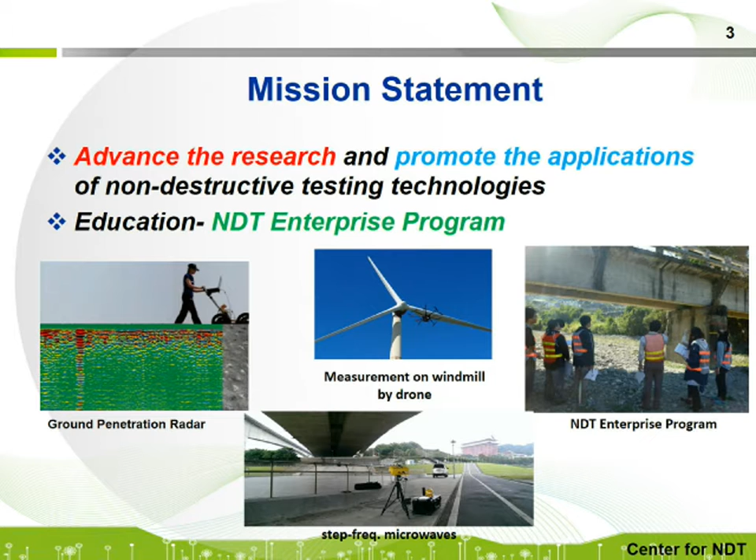General information. First, I would like to talk about the history and the revenue. The Chaoyang University of Technology was founded in 1994. Because there are several professors in our department with specialties related to civil NDT, we started the Center for NDT in 2005.

In 2014, the name of the center changed to Research Center for NDT because it becomes one of the research centers supported by the university.

The annual commissioned budget averaged 10 million NT dollars for recent years. The projects conducted by our center include testing targets of tunnel, embankment, bridge, reservoir, building, pier, nuclear power station, wind turbine, highway, and airport. So they are very versatile.

There are 7 main researchers in our center. Professor Chen, Professor Shi, and Professor Chang, their specialties are in structural NDT and structural health monitoring. Professor Cai, Professor Xu, and Professor Lai, their specialties are in geotechnical NDT. And Professor Huang, whose specialty is in remote sensing applied to NDT and image processing techniques.

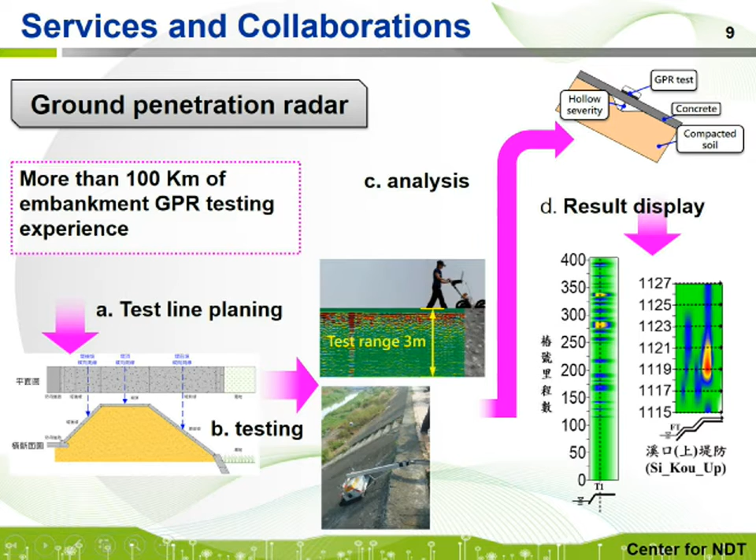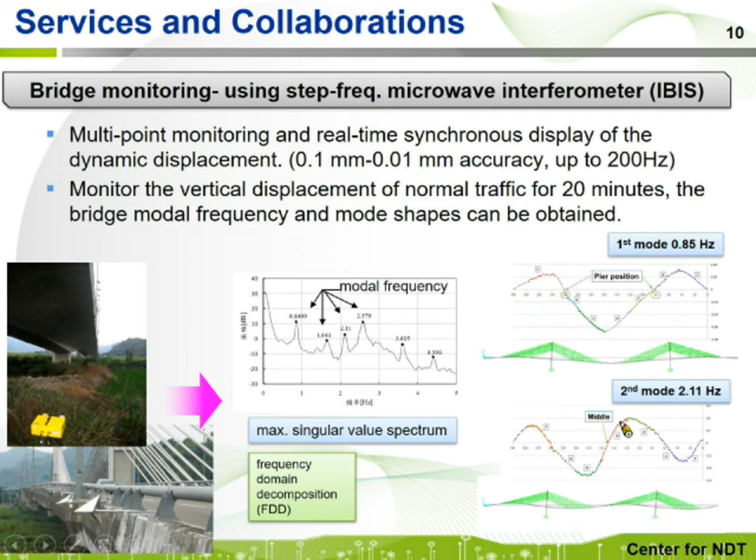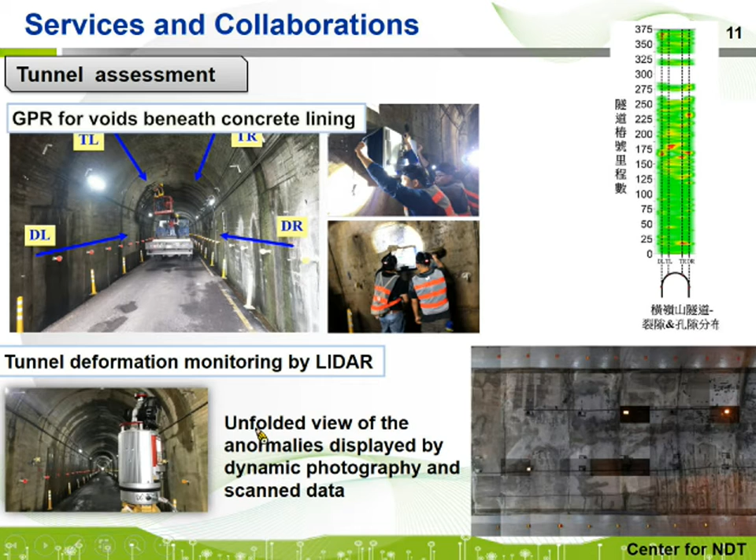We use multiple methods for tunnel assessment. We use ground penetration radar to assess voids beneath concrete lining and use LiDAR scanning to monitor the tunnel deformation, using dynamic photography and the LiDAR scan data to create the unfolded view of the anomalies in the tunnel.

For the wind turbine structural safety assessment and monitoring, two non-contact monitoring methods were applied. We use UAV carrying infrared camera and regular camera to fly around to visually inspect damages on pylon and arbor. And we use the microwave interferometer placed under a pillar to check the mode shape and the vibration mode frequency of the pillar.

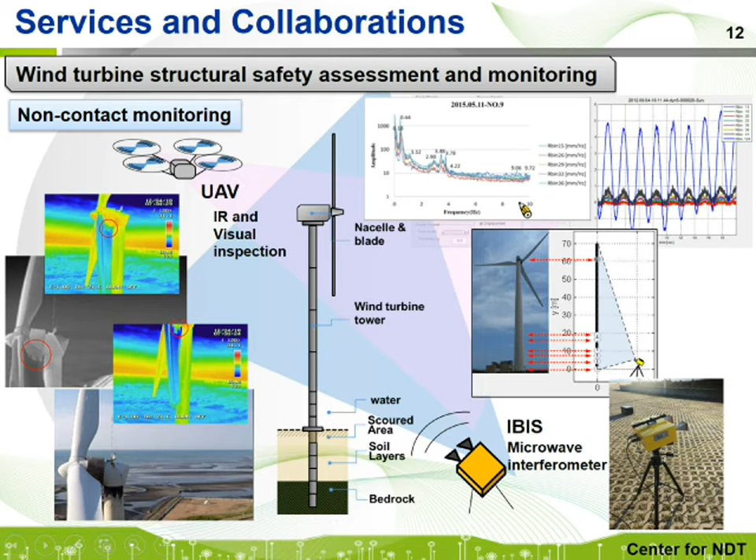I would like to introduce two innovative stress wave methods developed in our center to assess the debonding at steel-concrete interface, for cases such as concrete-filled steel tube damaged by fire, not fully filled epoxy resin for factory floor strengthening by steel plate, or the weir strengthened by steel plate.

One method is to place the small hammer impactor away from the receiver to obtain the Lamb wave modal vibration and use the difference of A0 mode dispersion curve of the steel plate to assess the debonding.

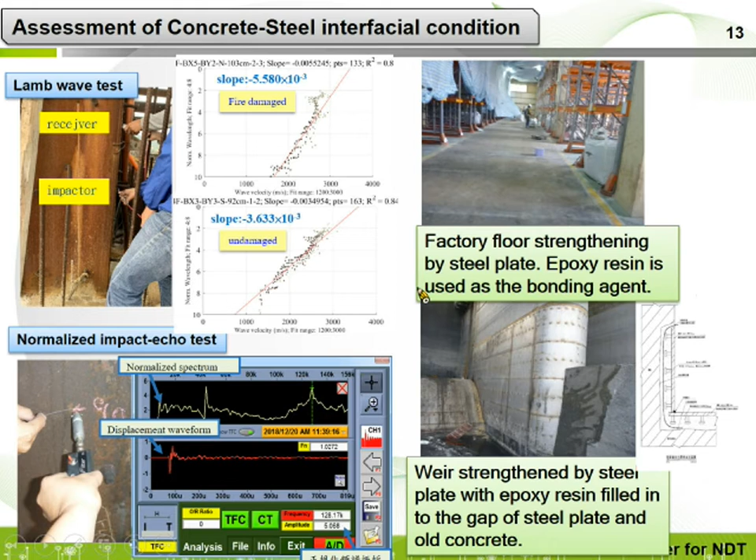The second one is to place the hammer close to the receiver and use the amplitude of the peak in the normalized amplitude spectrum to examine the voids underneath the steel plate.

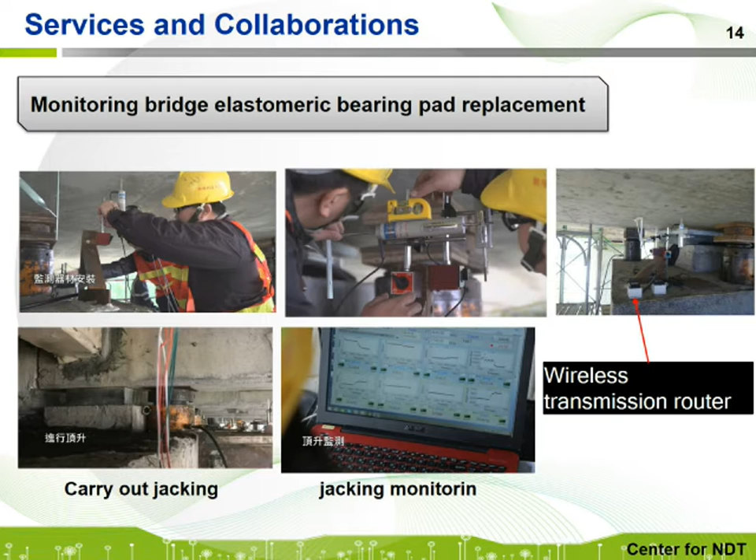Conducted many cases of monitoring replacement of bridge bearing pad during jacking up the bridge girder. Worth mentioning is that wireless transmission routers were applied to transmit signals of the displacement sensors to the computer, so that the monitoring becomes quite easy without connecting a large number of electric wires.

For the ongoing research projects, first is the project funded by the Ministry of Science and Technology. In this project, we assess the depth of damage for reinforced concrete after fire using the dispersive characteristic of Rayleigh wave group velocity. We use one impacting hammer and a displacement receiver or microphone to obtain the Rayleigh wave, and use short-time Fourier transformation and reassignment method to obtain the dispersive curve. After the proper inversion process, we can get the velocity profile with respect to depth, so the damage depth after fire can be assessed.

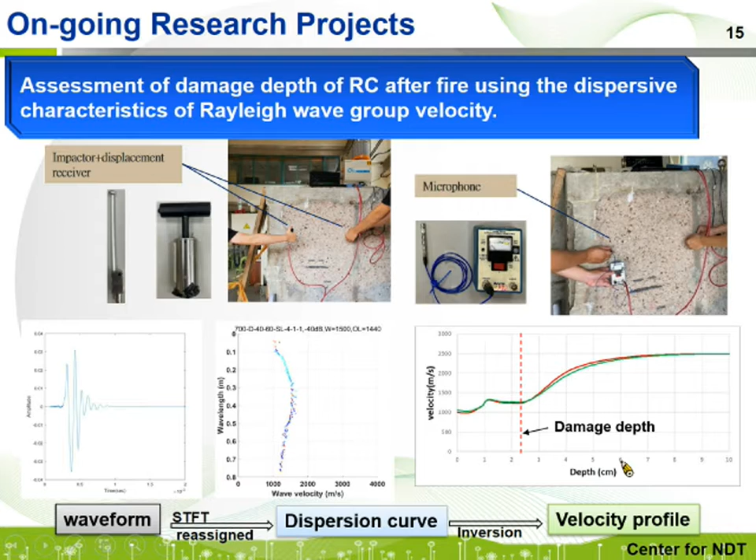Second project is funded by National Chung-Shan Institute of Science and Technology, using AI deep learning on ground penetrating radar imaging recognition for embankment assessment.

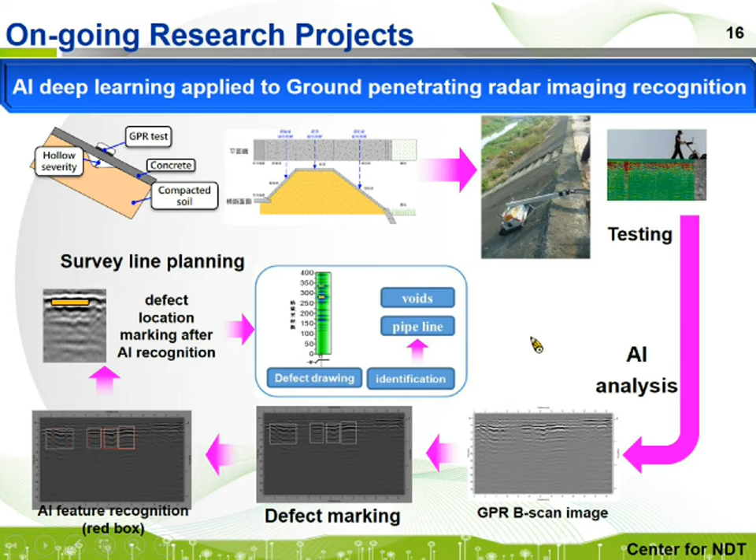An ongoing research project is to apply digital image correlation (DIC) to monitor wind turbine pillars. The preliminary research was conducted in the lab using two digital cameras to measure the 3D movement of a pillar with multiple marks and multiple defects, using the modal difference index to identify the severity and location of the defects.

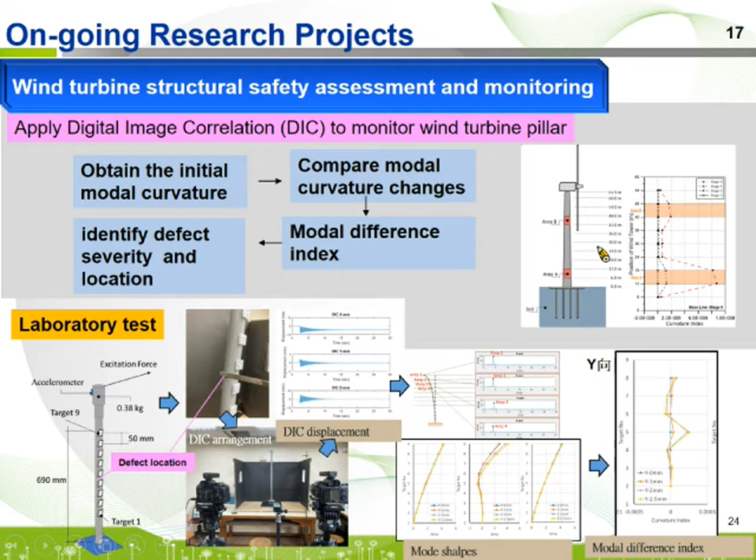Education: our center supports junior and senior year projects, also the NDT Enterprise program, which has 15 credit hours. In the program, students can learn how to operate NDT instruments. They also need to take designated courses related to non-destructive testing and financial management. Currently, about 130 students are enrolled in this program.

For international cooperation, Professor Chia-Chi Cheng and Keng-Tsang Hsu cooperate with Professor Yi-Ching Ni of Hong Kong Polytechnic University for a project to assess delaminated cracks in cement asphalt mortar layer of high-speed rail tracks in China, using the normalized impact echo method.

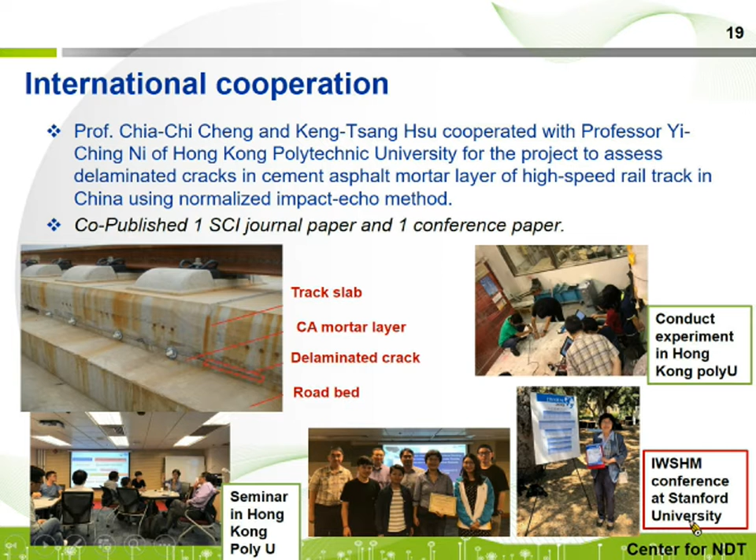Professor Chi Hong Chiang represented CYUT Center for NDT, participating in the annual meeting of the World Federation of NDT Centers. The meeting was held in Minneapolis, USA, in 2015.

In the recent 5 years, we published about 10 journal papers each year, and also several conference papers. So we welcome scholars from all over the world to visit us, and also students who are interested in non-destructive testing are welcome to apply for master's or doctoral programs.

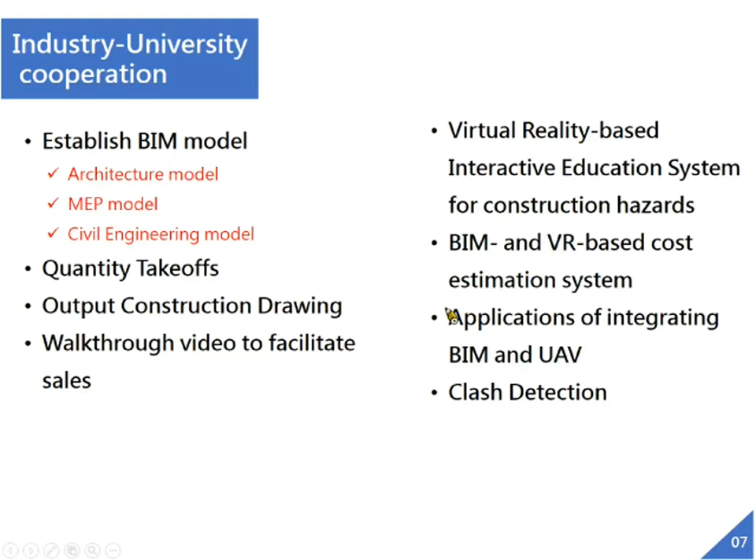First part is industry-university cooperation. The services we provide include BIM model establishment, quantity takeoffs, virtual reality-based interactive education system for construction hazards, and BIM and VR-based cost estimation systems. The details will be introduced below. By cooperating with industry, students can learn the skills of BIM-related software, and also learn the requirements of practice.

This is a case about BIM model establishment. The general contractor used the BIM model to detect clashes and discuss the details of the building, like the tiles, like the shaped roof.

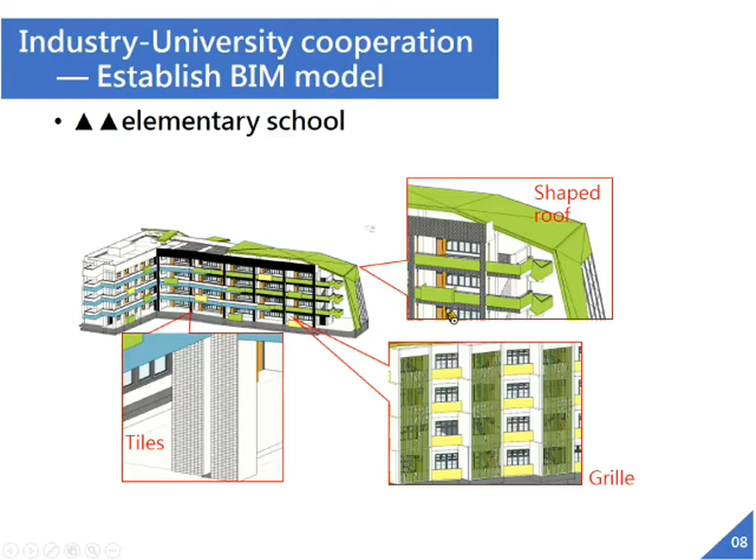What is more important is the integration of the electromechanical model and the structural model. This is because electromechanical engineering is more complicated than structural engineering in practice. Through the BIM model, all parties can understand in advance how to arrange the electromechanical pipelines.

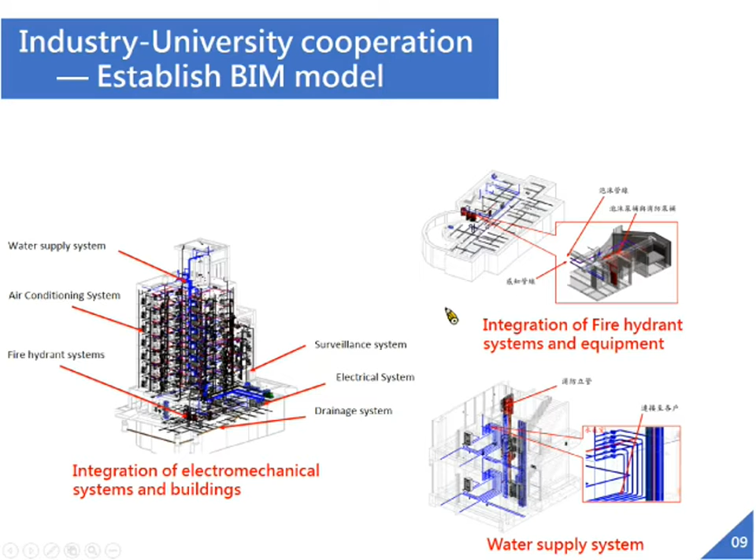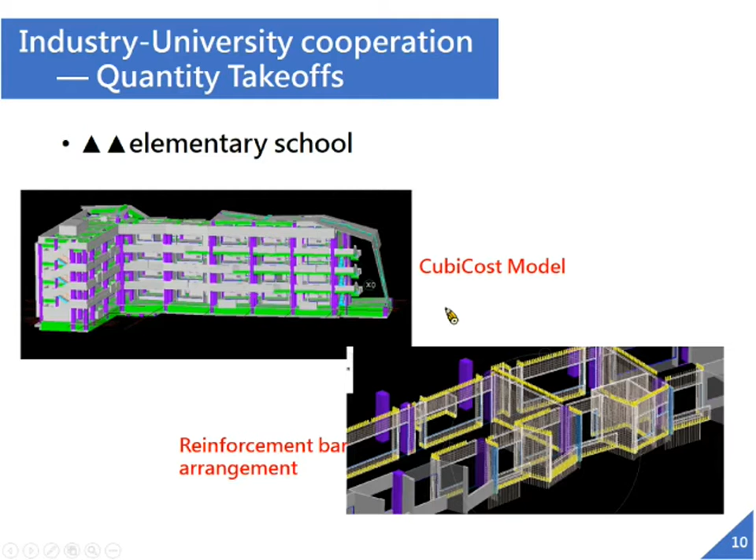In addition to viewing 3D models, BIM models can also be used for quantity takeoffs. The calculation result can assist the owner or general contractor to evaluate the project budget quickly. The 3D animation is also an important function of BIM. It can show the expected view and environment, helping the owner or customer foresee the building before completion.

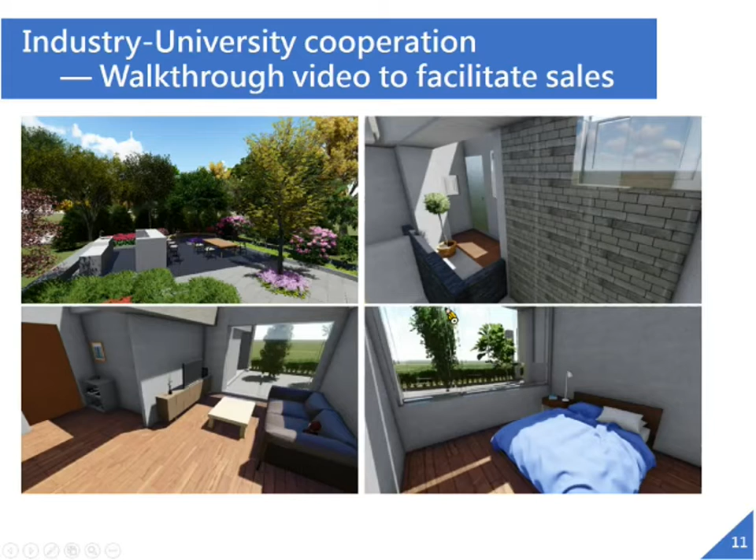Here we have a video showing the 3D animation made from the BIM model.

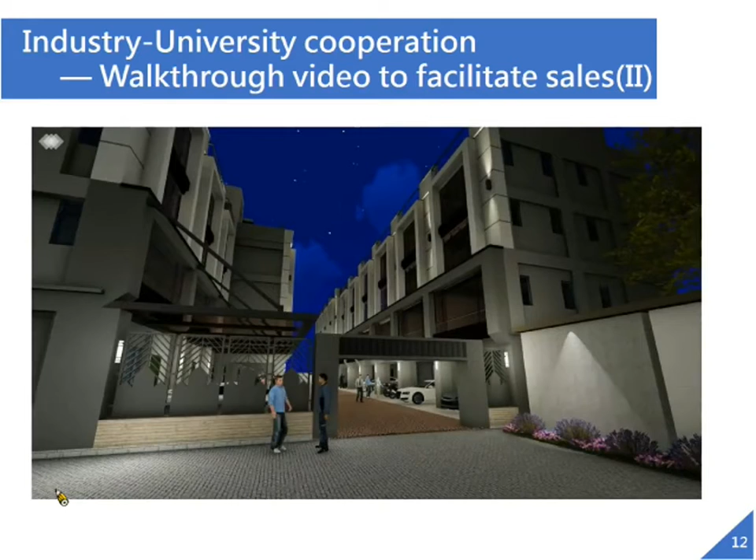Okay, it's a video we made with the BIM model.

By the 3D animation, it can also facilitate space planning. This is a case on campus. We used the BIM model to help them plan the campus space.

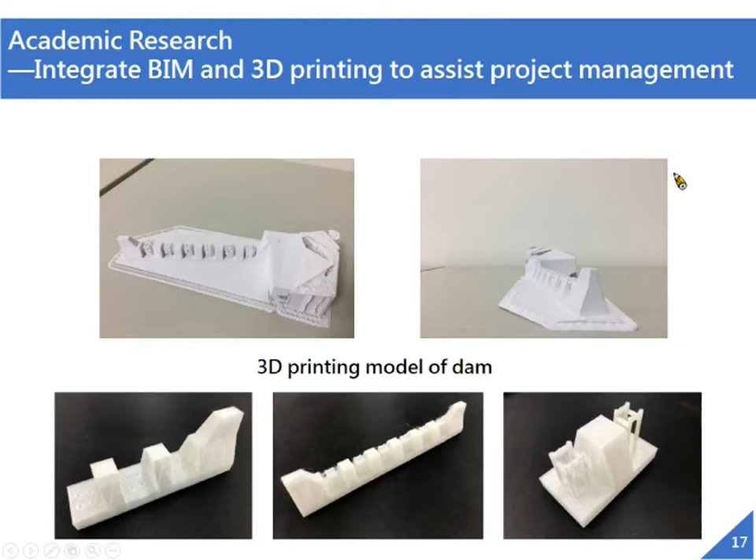This is about integrating BIM and 3D printing. We try to transform the BIM model into a 3D printing model. When we print the virtual model out, the laborers can discuss how the facilities can be assembled, so it can facilitate the construction process.

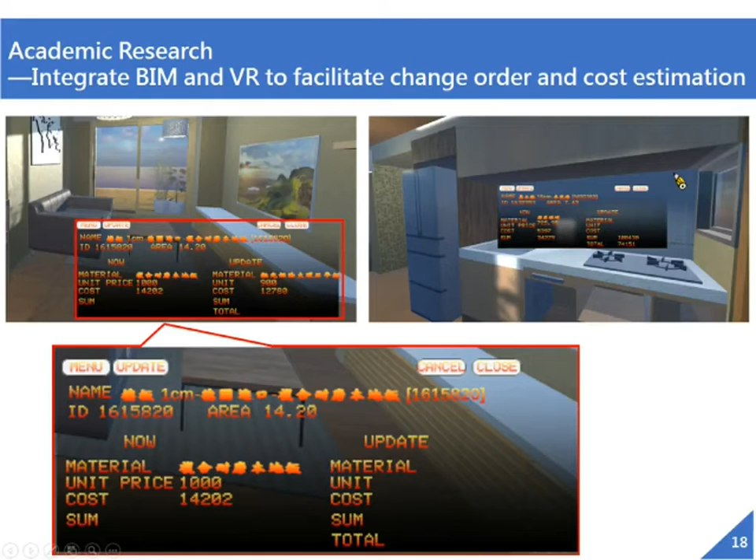We also developed a BIM and VR-based cost estimation system. When a change order occurs in a construction project, we usually need almost two weeks to estimate the cost of the change order. By using this system, customers can see the changes in the VR environment directly, so they can know if the changes meet their requirements or not. When the change is done, the cost of the changes can be calculated automatically, saving lots of time.

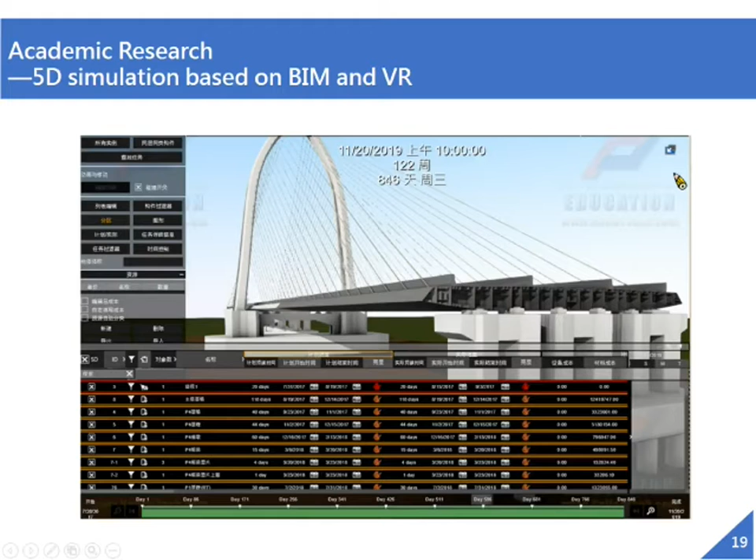In a study of 5D simulation based on BIM and VR, a cost and schedule management model is developed. First, a BIM model is linked with the schedule activities to simulate the construction process. Then the cost item is integrated into the 4D simulation to develop the progress curve. In addition, this research further presents the model in the VR environment.

The third part of the BIM Center's work is the most important part, personnel training. We have several BIM-related classes in our department, including basic classes and advanced classes. Basic classes are for model establishment, and the advanced courses are for BIM applications.

This is because all of them need to build their own models. Everyone needs to have a complete model by themselves, and then they should display their models using the animation software.

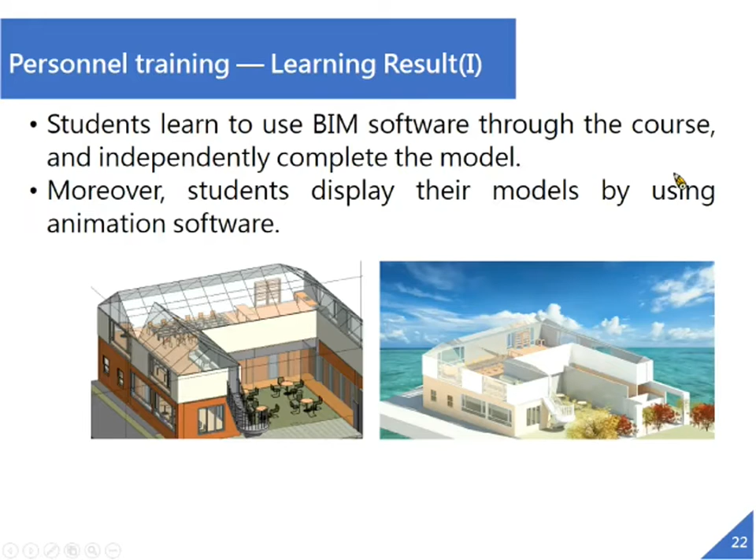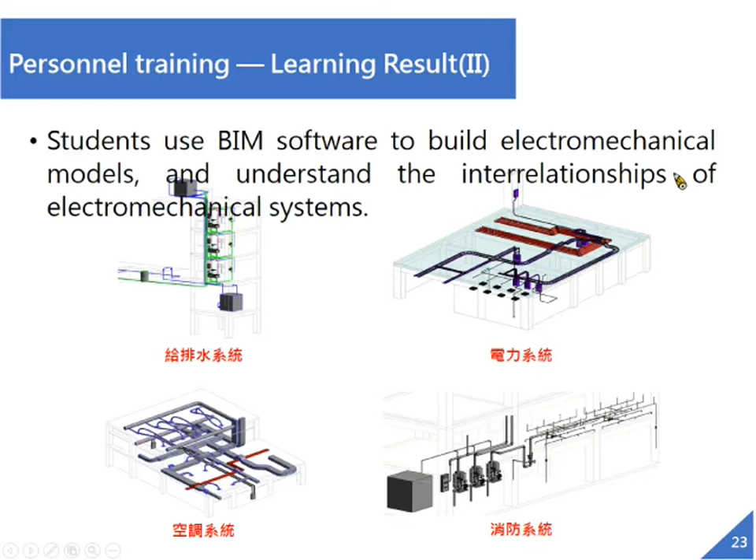Students also need to build electromechanical models and understand the interrelationship of the electromechanical system, and then integrate the electromechanical system and the structure.

Students also use the Cubicost quantity takeoff software. They build a BIM model and then do the quantity takeoff to calculate the cost of the building model.

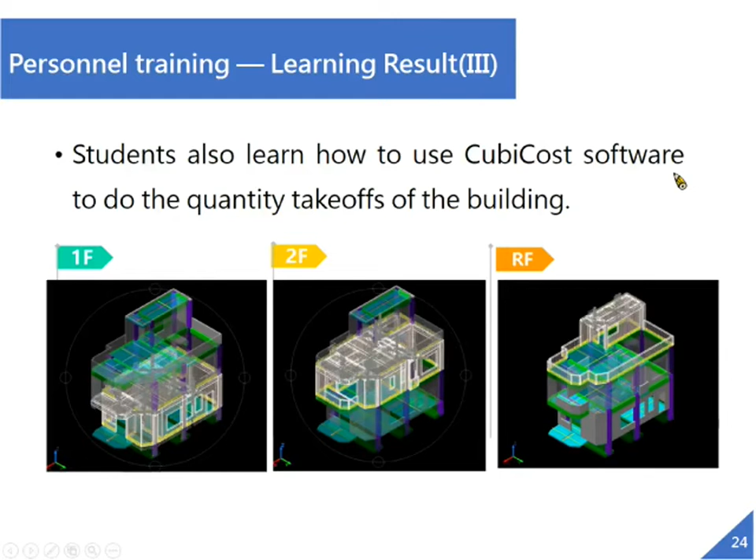That's all about the BIM Center in the Department of Civil and Construction Engineering. Thank you for your time and attention.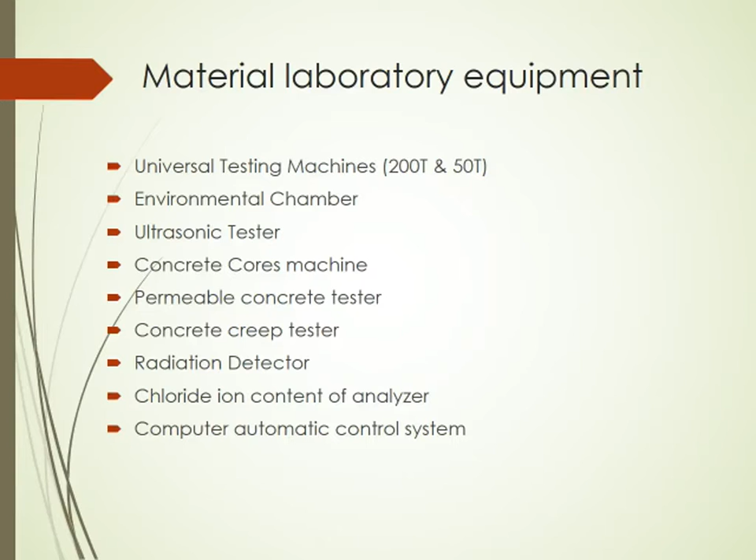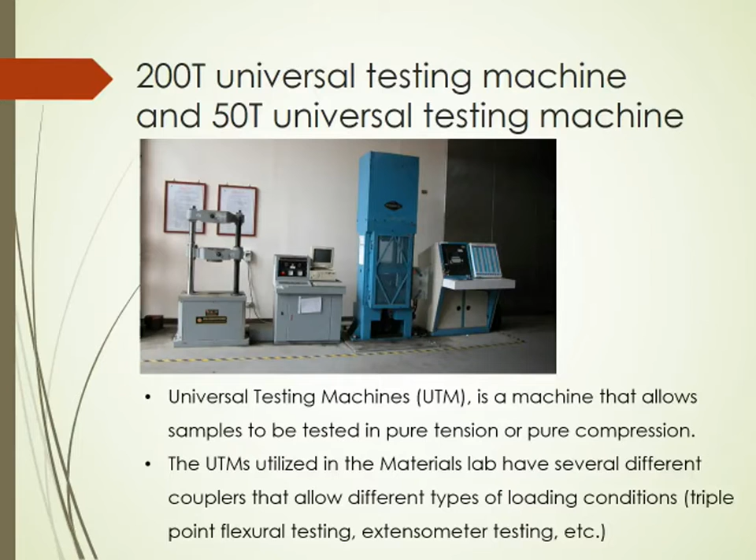Now let's introduce our universal testing machines, 200 tons and 50 tons. A universal testing machine is a machine that allows samples to be tested in pure tension or pure compression. The universal machines in the materials lab have several different couplers that allow different types of loading conditions.

The environmental chamber is capable of controlling temperature as well as humidity. It has a temperature range of -4 to 212 degrees Fahrenheit with a temperature constancy of plus or minus 0.5 degrees Fahrenheit. The chamber also has a humidity range of 10 to 95%, depending on ambient temperature and humidity, with accuracy of plus or minus 2.5%.

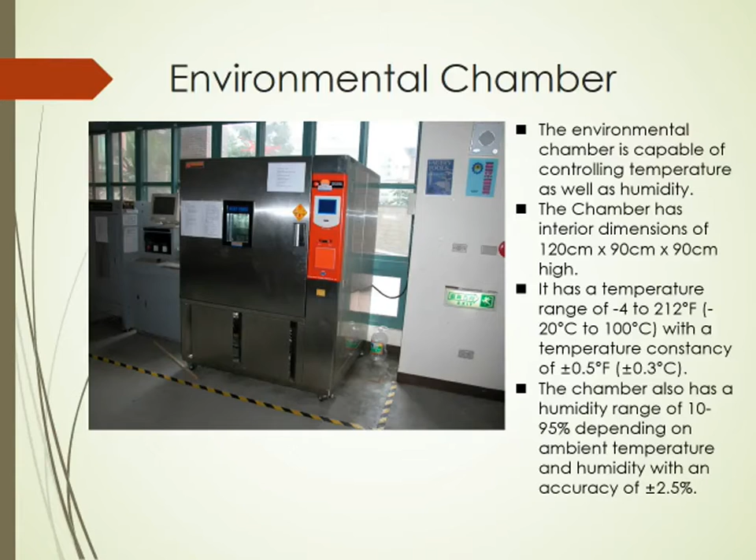Now let's talk about our geotechnical services. We have material property tests of soils, in-situ monitoring of slopes and retaining structures, bearing capacity evaluation of foundations, geological investigation using seismic wave techniques, ground improvement evaluation, integrity tests of piles, and liquefaction potential evaluation.

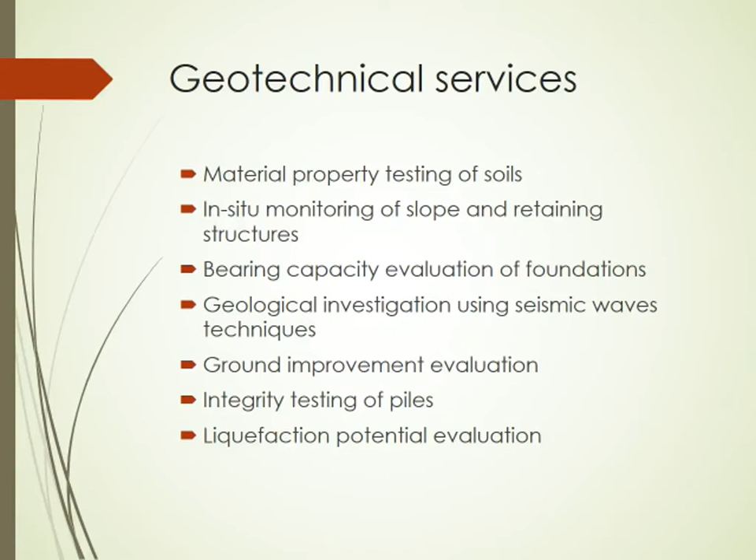This is direct shear test equipment. A direct shear test is a laboratory test used by geotechnical engineers to measure the shear strength property of soil.

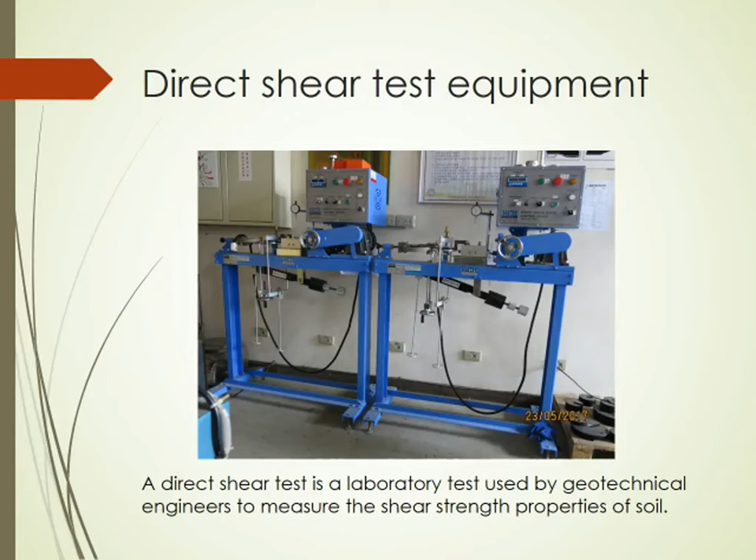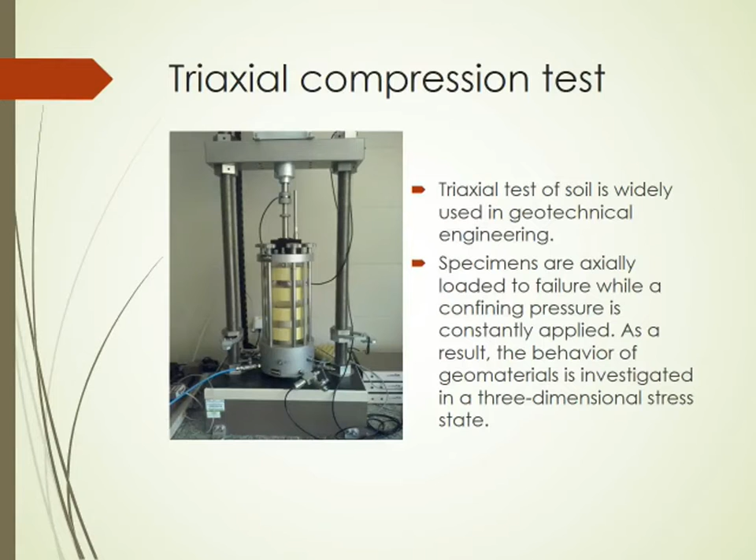Triaxial compression test: the triaxial test of soil is widely used in geotechnical engineering. Specimens are axially loaded to failure while a confining pressure is constantly applied. As a result, the behavior of geomaterials is investigated in a three-dimensional stress state.

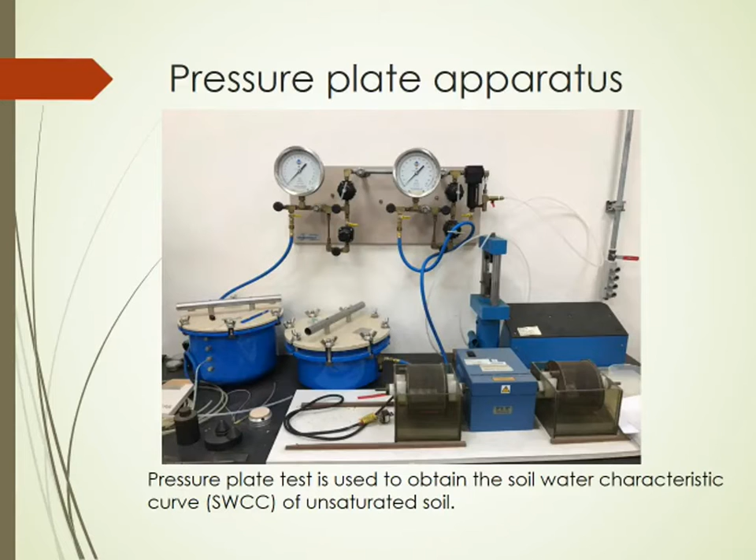This is pressure plate apparatus. The pressure plate test is used to obtain the soil water characteristic curve of unsaturated soil.

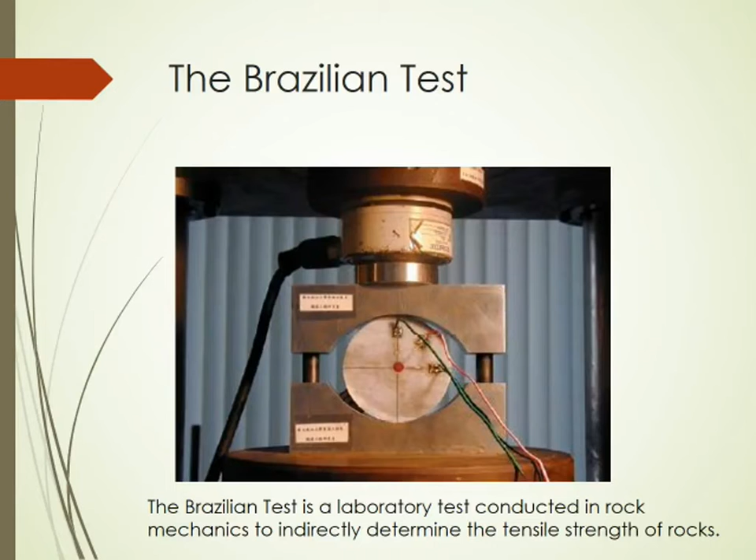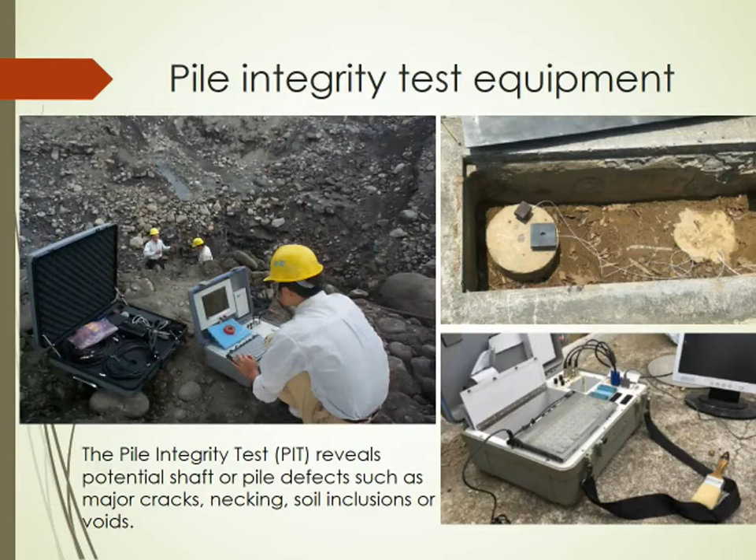This is pile integrity test equipment. The pile integrity test reveals potential shaft or pile defects such as major cracks, necking, soil inclusion, or void.

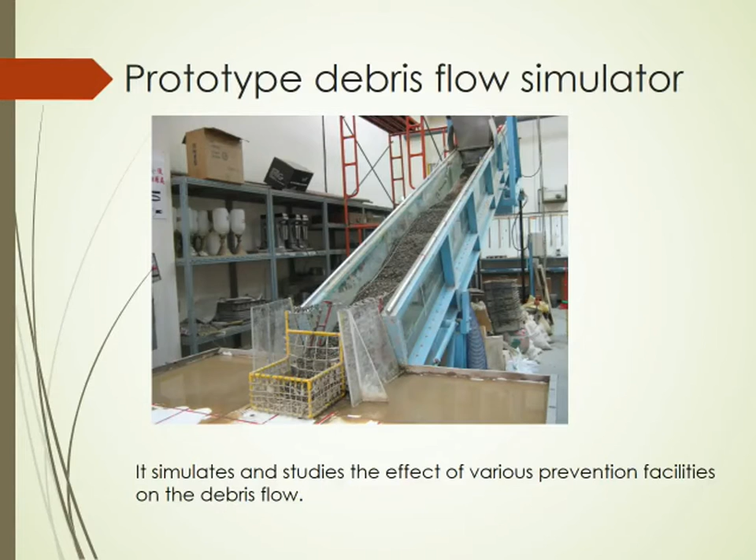This is prototype debris flow simulator. It simulates and studies the effects of various prevention facilities on the debris flow.

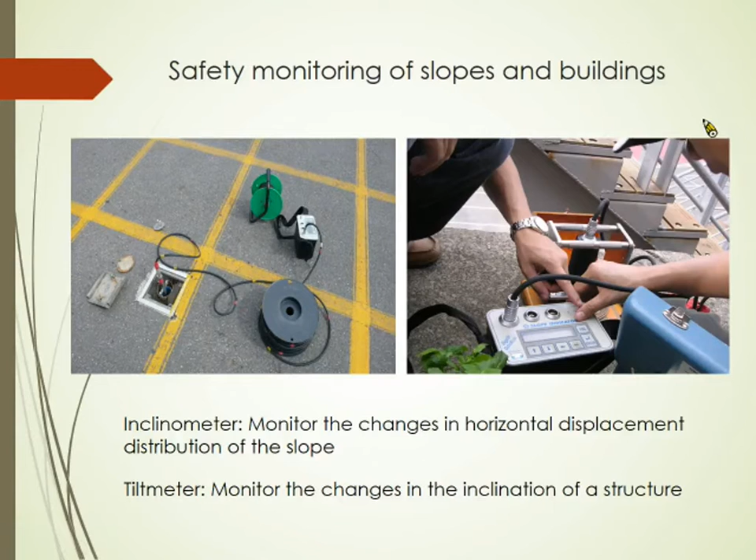This is safety monitoring of slope and buildings. The first picture here is an inclinometer, which monitors the changes in horizontal displacement distribution of the slope. The second picture is a tilt meter, which monitors the changes in the inclination of the structure.

Now we introduce our structure laboratory. It is equipped with a 20 meter by 10 meter by 0.7 meter reaction slab and an 8 meter, 7.2 meter, and 1 meter reaction wall, which provides the vertical and horizontal loading reaction supports for large-scale structure load tests. A lifting crane system with 14 meter clear height and a 20 ton capacity is also equipped for transporting large specimens.

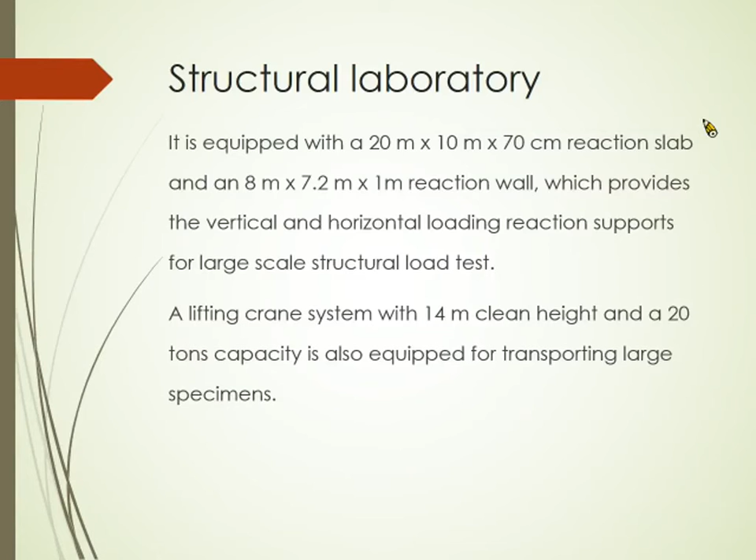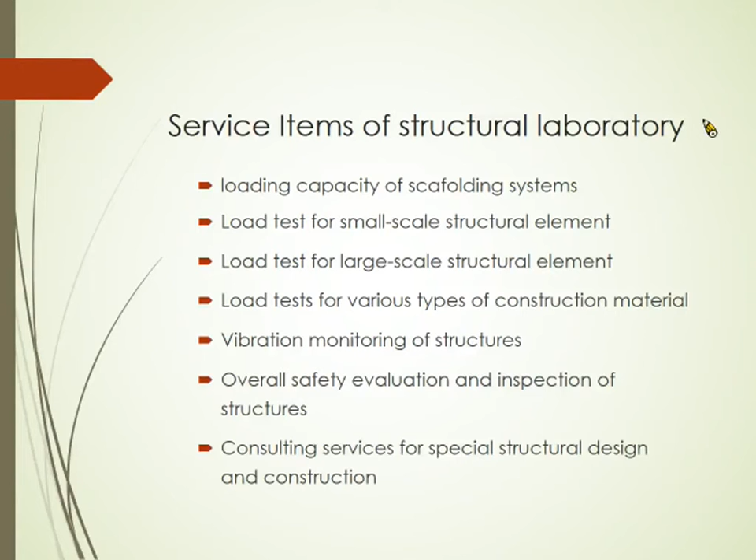This is a summary of our structure laboratory. We perform loading capacity tests of scaffolding systems, load tests for small scale and large scale structure elements, load tests for various types of construction material, vibration monitoring of structures, overall safety evaluation and inspection of structures, and consulting services for special structure design and construction.

As you can see, this is our 135 ton, 4.5 meter clear height scaffold loading system. Here's the scaffold loading test video.

You can watch right here: the vertical bar in the lower right corner will buckle. Okay, the buckling happened right here.

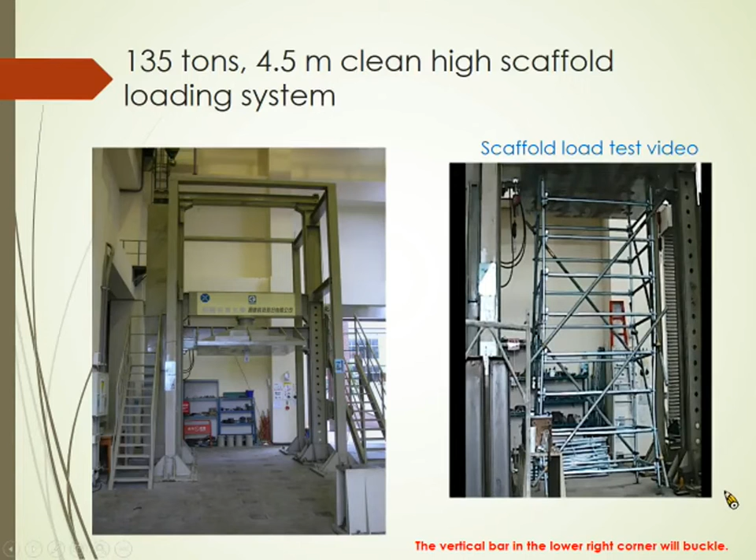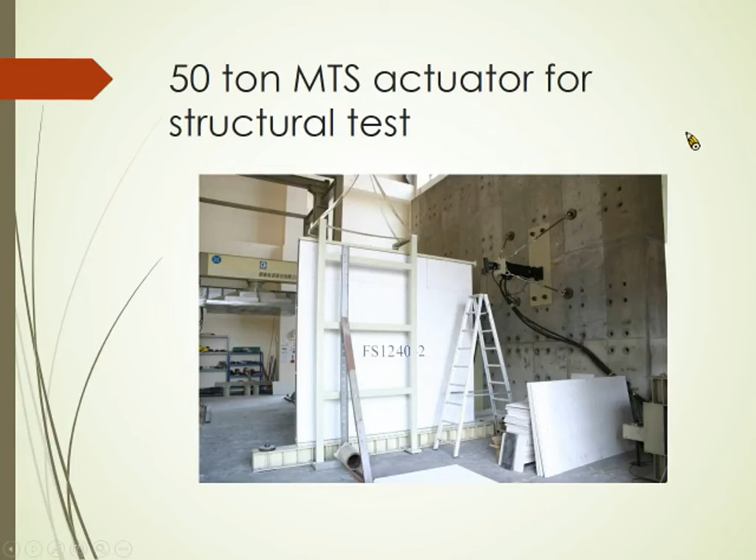Now let's see the video of a lightweight steel frame load test using our 50 ton MTS.

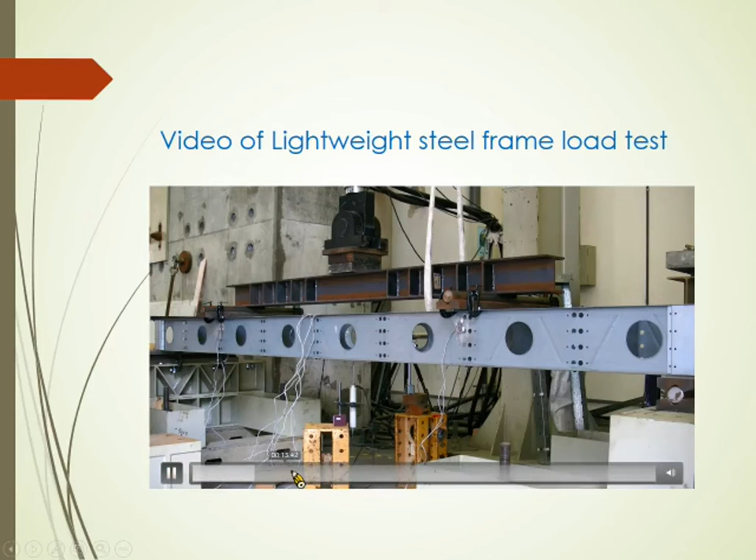Now the pressure is coming to 20 tons. Yeah, you can see the buckle right here. Okay, the breakdown.

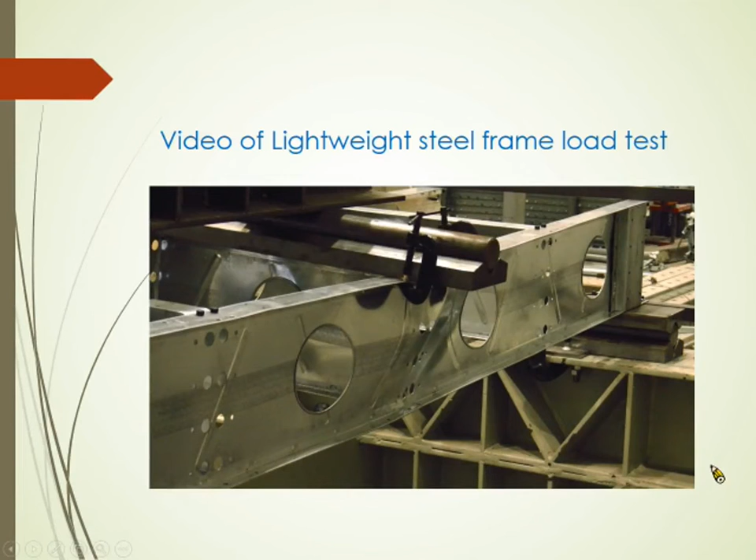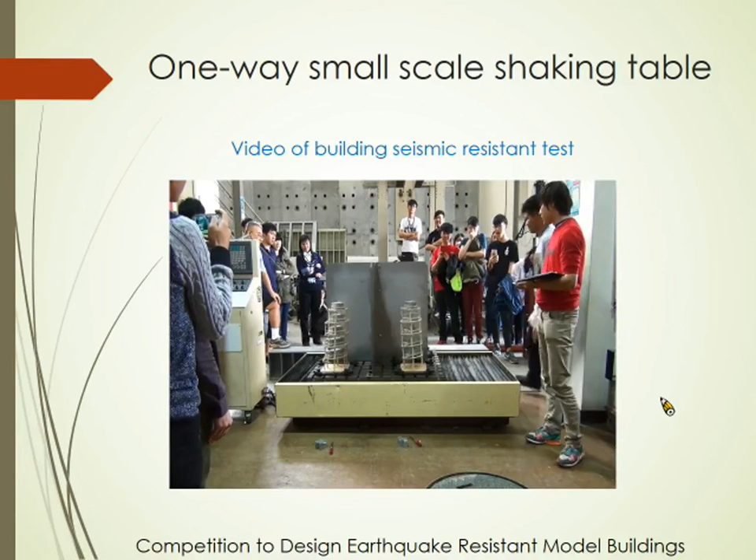Now it's going to the end. Now it's shaking a lot. Okay, it broke one in the back, and this one also broke down, and this one is still safe.

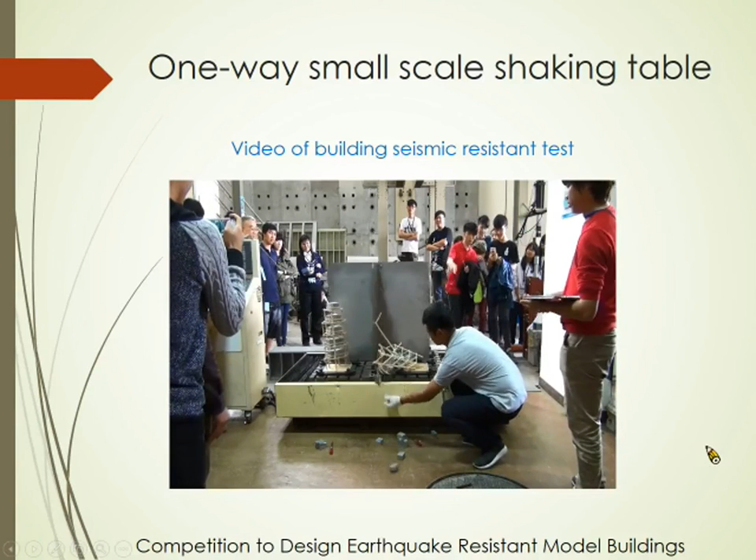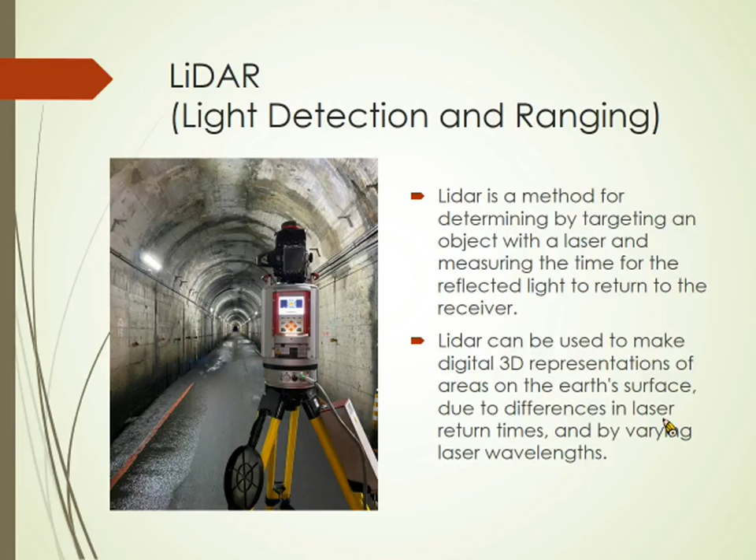Now introduce LiDAR, light detection and ranging. LiDAR determines distance by targeting an object with a laser and measuring the time for the reflected light to return to the receiver. LiDAR can be used to make digital 3D representations of areas on the Earth's surface, due to differences in laser return times and wavelengths.

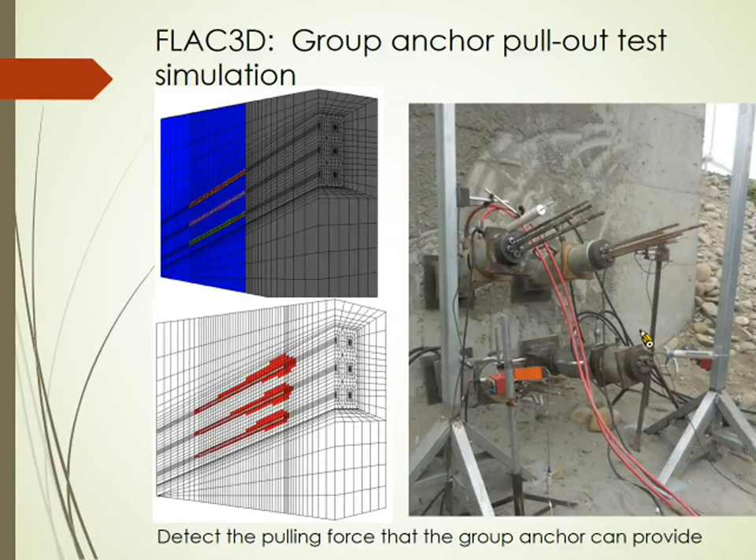Now this one is FLAC3D, a group anchor pull-out test simulation. It can detect the pulling force that the group anchor can provide.

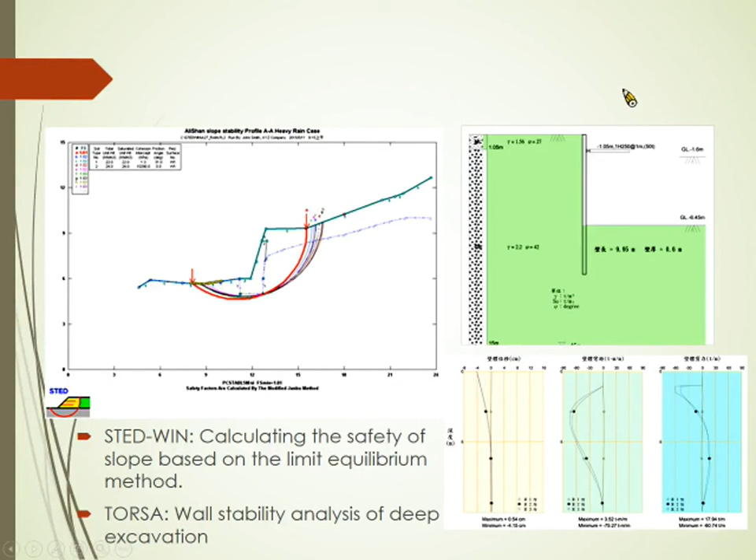Now I'll make a brief conclusion. These three centers and their members have contributed tremendously to the development of our department. Therefore, academia-industry collaboration and government funding both support the faculty members and students in publishing their research